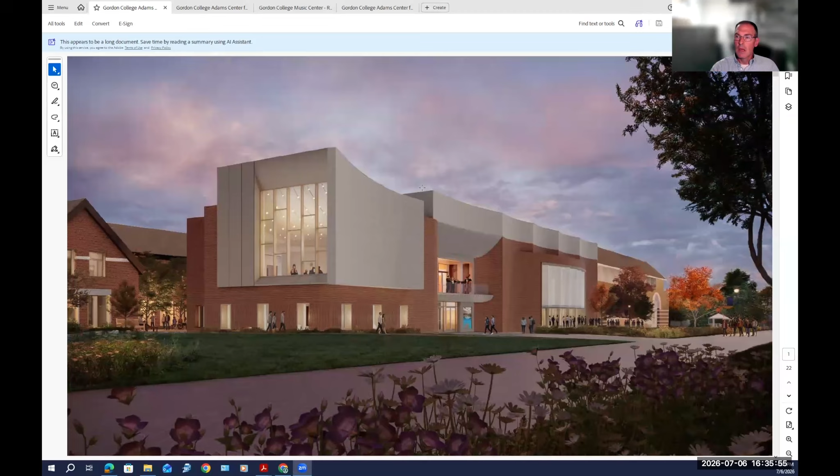This is Jacob speaking from Waterfield Design Group. The first couple images here are the architectural views of what the building will be. We went through this last time, so nothing has changed here in terms of what the building looks like. It's the removal of the existing courtyard, walkway, and landscaped area, replaced with a new proposed Adams Center for music and associated patios and walkways. The new building is approximately 15,000 square feet. So this is rendering what it'll look like looking north, looking south. This is south looking north.

Just real brief, existing conditions: the walkways, the existing Phillips Center, the conservation setbacks, which we can talk about briefly when we get to that part of the project. New layout with the building taking across the walkway areas, walkways getting bumped out to make a streamlined main campus corridor coming through, with different patios in the front and also in between the two buildings.

Utilities and stormwater, we've gone through the peer review. I can just talk briefly about that. There were some comments from Weston Sampson; we addressed those comments. I think the only thing that really showed much on the plan is we added a couple more chambers to meet the 25 and 50-year storm requirements. Other than that, there were some more technical details that I won't get into unless necessary.

I'll just say the one item that probably will come up is a note we added to the plans saying we'll do an additional test pit in the recharge area to confirm there's no groundwater within 4 feet of the bottom of the chambers. We're already at 3 feet 2 inches, so we just need another 10 inches. That wasn't plausible with the whole campus going on around us, but during construction that'll be an easy test pit to dig and confirm.

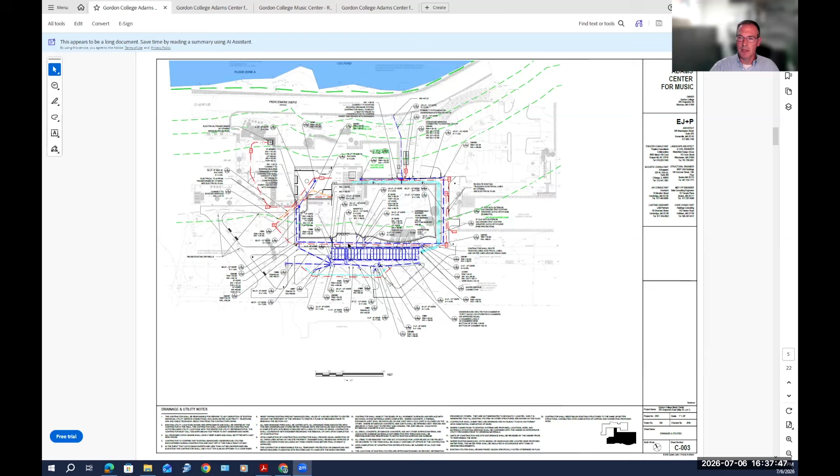And then landscaping, we've gone through with conservation, and they're good from what we've seen so far from the plantings and everything in the rear.

I'll just say this quickly. We're meeting with conservation on Monday. Really the last item outstanding from our previous meeting was the peer review, and the peer review signed off -- they were good. So we anticipate we will get Conservation Commission approval on Monday now that we have a clean bill from the peer reviewer.

And I'll let Amanda talk about the lighting.

The new exterior lights will all be downward directed in the high circulation areas and provide safe light conditions in the campus environment. They will be controlled by a digital lighting network, which can be programmed to turn off groups of light late at night as determined to be practicable and safe.

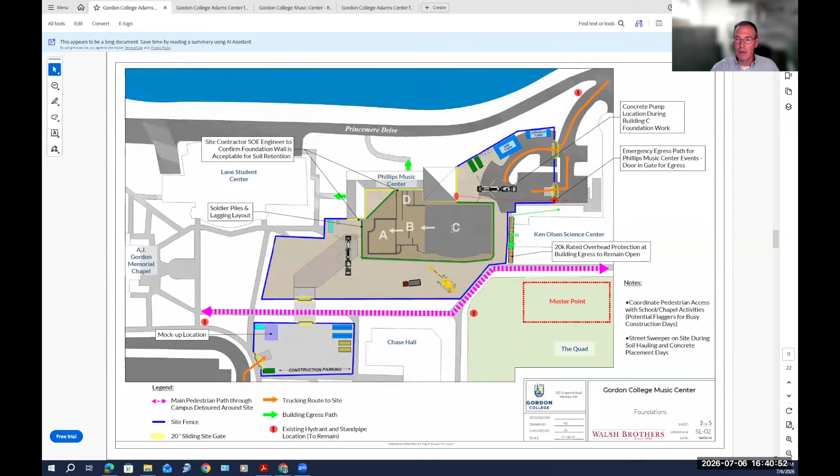Rich, do you mind if I just say a couple things? Of course, okay.

Jacob, about that construction route, where do you anticipate those trucks coming from? Mostly 128? Yes, mostly. Will there be -- they won't be going through Wenham? Correct, they'll be coming mostly construction vehicles from there. Okay, that's one of the things we usually like to confirm.

Just so the board knows, and the Gordon College people, I had sent a memo to the board with some comments -- that we can condition the test pit issue. So we talked to our peer reviewer as well as the building inspector about that. And I can make a recommendation afterwards. As Jacob mentioned, the Conservation Commission has reviewed and should be issuing their order of conditions sometime next week.

Everything's been dated and stamped by a registered engineer as we requested. The landscape plan was approved by the tree warden, so they are comfortable with it as far as invasive species and location of plants. And we've already discussed the lighting, so the board can discuss or ask further questions if needed.

Just so you know, the plans did go to the police department and assessors. We don't need to send it to water or the Board of Health because Gordon College gets their water and sewer from Salem Beverly Water Board, so there were no concerns there. The fire chief did finally sign off on these plans.

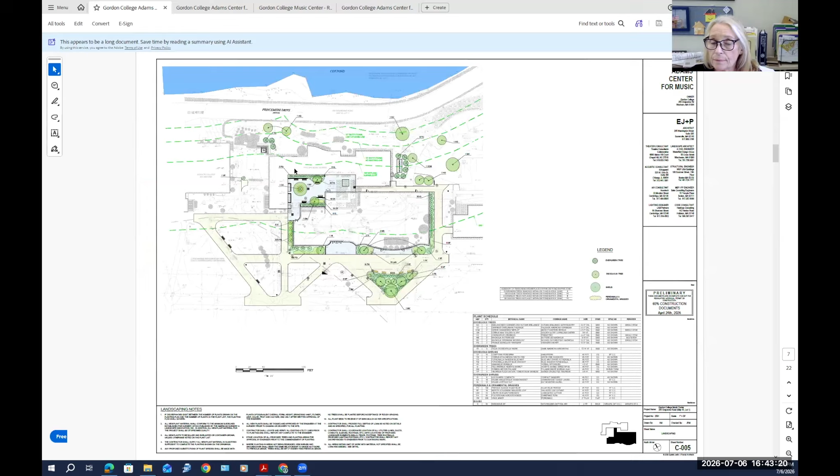Now, Chris, I know Ryan wants to talk a little bit about the handicap bathrooms, unless the board wants to ask questions on this part now, that's fine too. Rich, you can decide -- ask questions about the bathrooms now or table those until after? If you want to start with Adam's questions, feel free to.

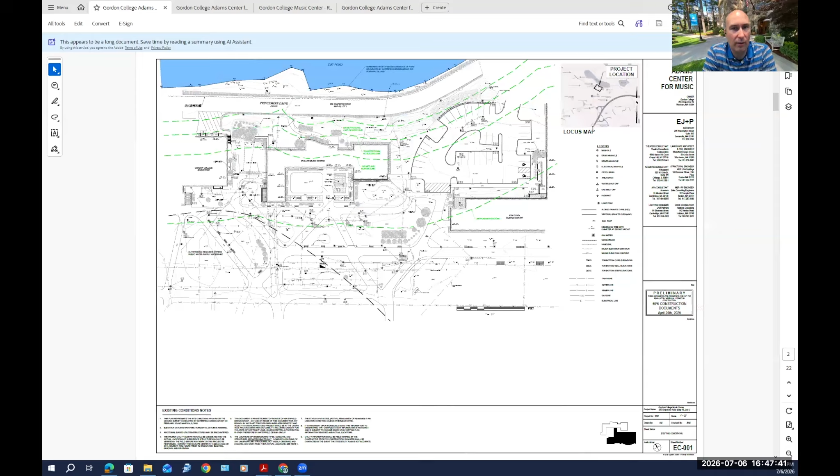Jacob, can you go back to the site, the view that also shows Lane Student Center? If you look to the left of the project work zone, you've got the Lane Student Center adjacent to the chapel. On the right side of the Lane Student Center, you see a larger full built-out area, which is where our college bookstore is on the second level and the mailroom down below. On the left side, closest to where it says Lane, you have a student venue, a little cafe area, and we're looking to bump out the building to the left about 400 square feet total.

Margaret, you have a set of plans that's already been through Conservation Commission for a negative determination. They said good luck with the project, moving on. So we're really just trying to get the formal site plan approval for being able to proceed with adding 2 ADA bathrooms to the campus space here.

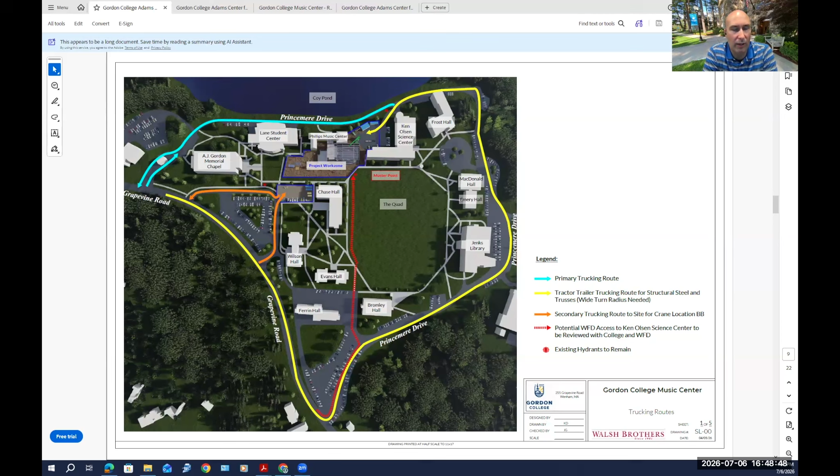I wasn't sure if, Ryan, you had any other comments you wanted to share, and if Margaret, if you had the plans to pull up, which might mean Jacob needs to stop sharing the screen. Yeah, all right, I have them. Let's see, there they are.

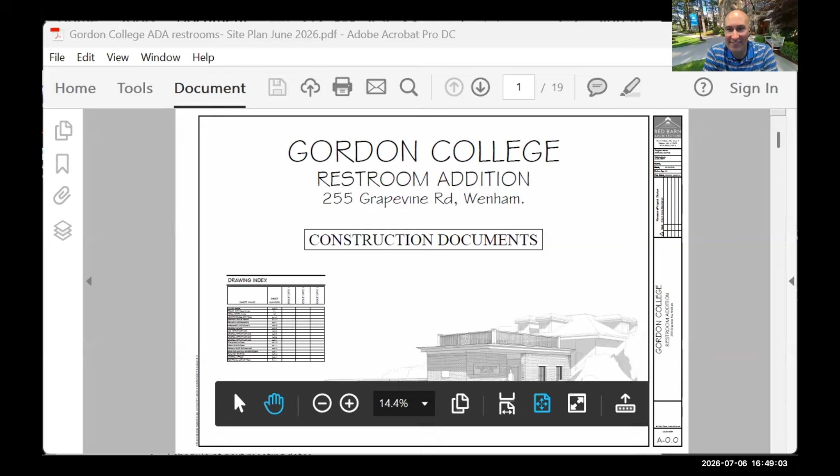So again, everything in Wenham is within the 200-foot buffer zone, so they went through and looked at that. Site plan, that last one, so it's right there. There's an existing patio there that just gets bumped out. It's outside the 100-foot buffer zone where you see that line right to the top there.

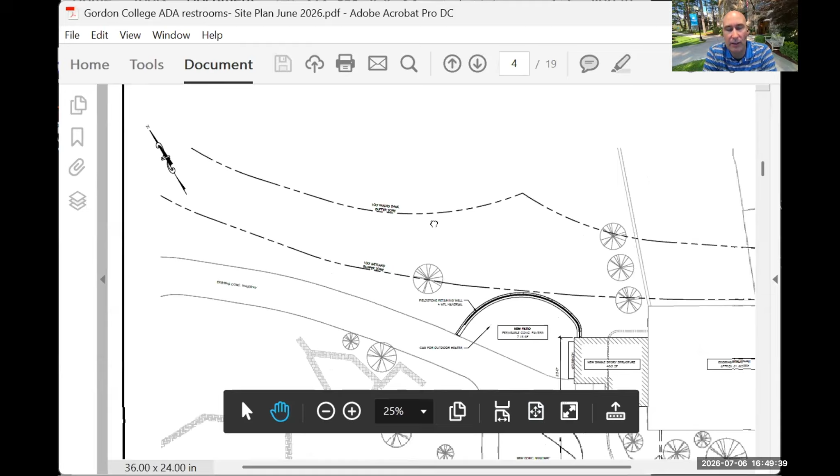And then the walkway gets extended there. So again, we maintain our same existing pedestrian path. Emergency vehicles use it for circulation as needed. And if we can go to one that shows the interior layout. Keep going, almost there.

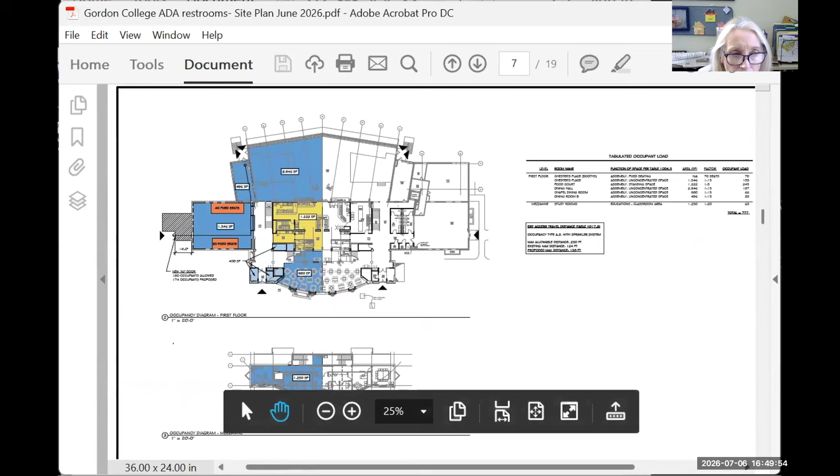Okay, so again, it's considered a minor addition, but the way the Wenham code is listed, because it's an exterior addition, it needs formal ZBA approval. So Rich wanted us just to pass it through you. Yep, is that it?

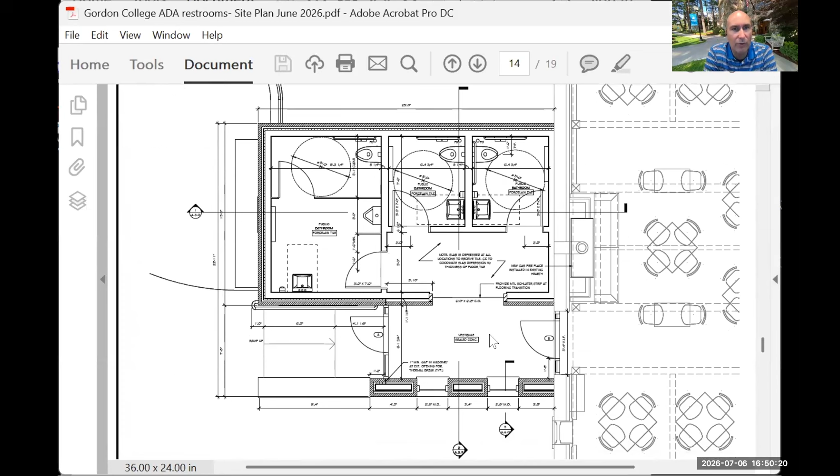It's similar to this, I think you've got an old one. Yeah, I think so too. I can share my screen if that's helpful. Yep, sure.

Yeah, we did some value engineering and just dropped it down to 2 bathrooms. Oh okay, yeah. And then we went from the beautiful curved patio to straight concrete forms as well.

So yeah, in this view, the bulk of the Lane Center is over here on the right-hand side of the page. The chapel is over here off page left, and our addition here is about 22 feet 4 inches out from the face of the building by about 23 feet in this dimension here.

We'll have a completely accessible entrance on this side over here, as well as access to these two new bathrooms here on the side of the building. And in the 3D rendering, here's the existing building beyond, and our little addition on this side of the building over here. So it fits in with the character of the building.

Reviewed with Rich and the fire team before, and again, considered a minor project, no main concerns. Margaret, were there any other comments from any of the departments on the expansion? No, no one had comments on this, and the building inspector was comfortable with it. Great, I have no comments on it.

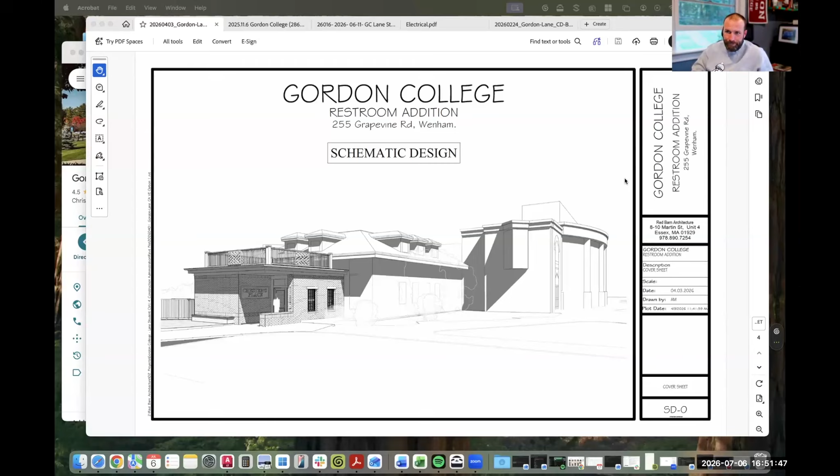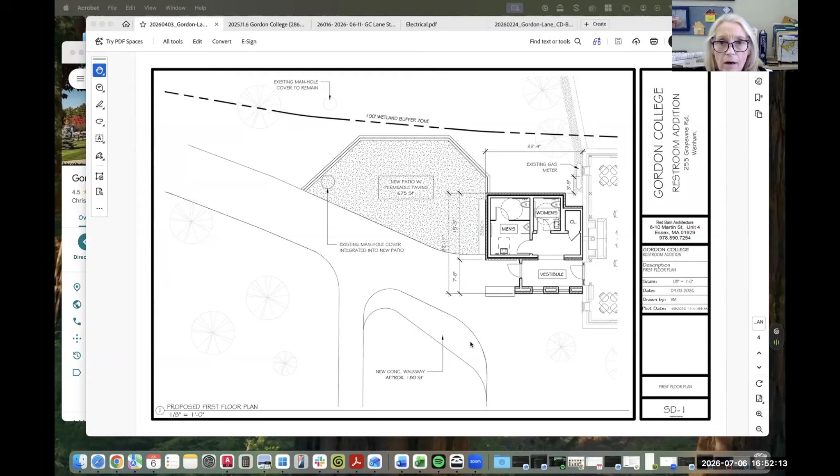Rich, we had come up with a few conditions. Deborah, they're different than the ones I sent you last week, I think. We just had to make a little amendment to them. So if you want, I can bring that up, I can put it up on the screen. These are our recommended conditions, and I don't think they've changed since we spoke last.

Sounds good. Rich, let me just see. Here. Is that it?

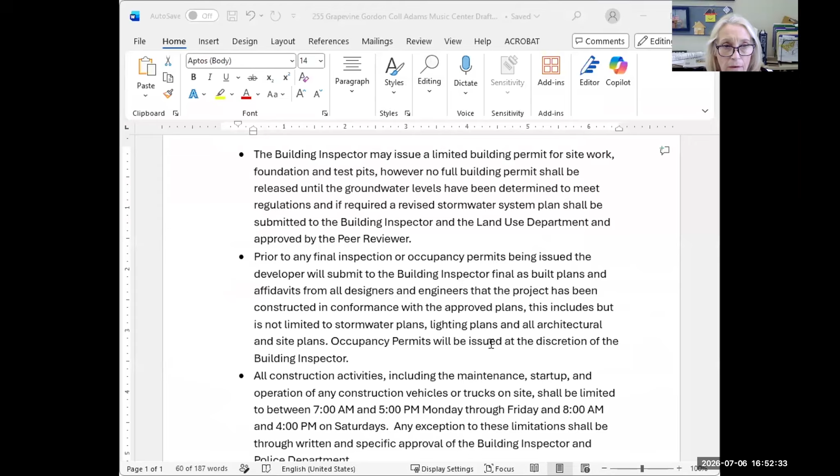Okay, so I spoke with the building inspector, and he recommends that the language for this is that he may issue a limited building permit for the site work, the test pit, and foundation work, but then no further work will be allowed until we get confirmation that the test pits and the groundwater was suitable, and we'll have that reviewed by our peer reviewer.

Jacob, do you have any concerns with this? Just because I haven't seen this before, so. Jacob, you're mute, Jacob. Sorry. Just in terms of the timing, I mean, I think that we will probably be requesting a site work building permit anyway as part of an early package, so that doesn't concern me.

Right, but I think it should be fine. Yeah, it'll be done early on. I mean, you'll want, we'll want Walsh to get set up.

We don't want to, but once they've got the fencing up, once they've got the site kind of cleared, it's usually best if they actually kind of take the topsoil and the brickwork off and stuff, and then we can easily just, so that'll be part of that. So that's understood. Yeah, thank you.

Just saying from a timing perspective that it will work for y'all to ensure that the test pit, the boring comes back as we thought, but you still have the ability to start site work.

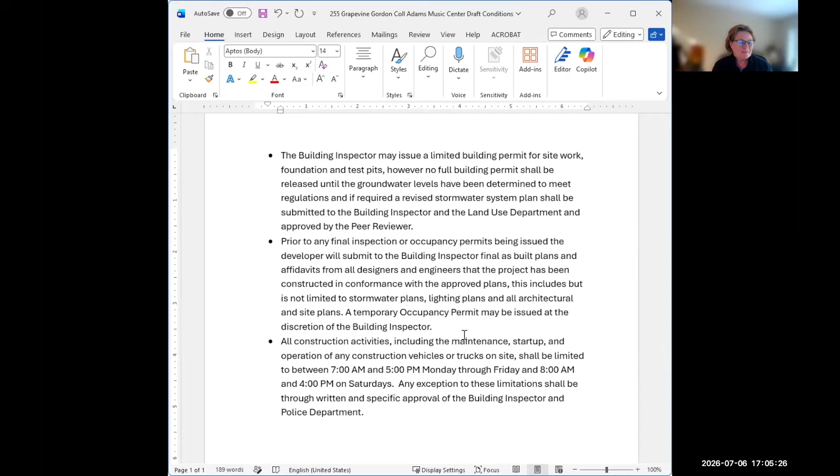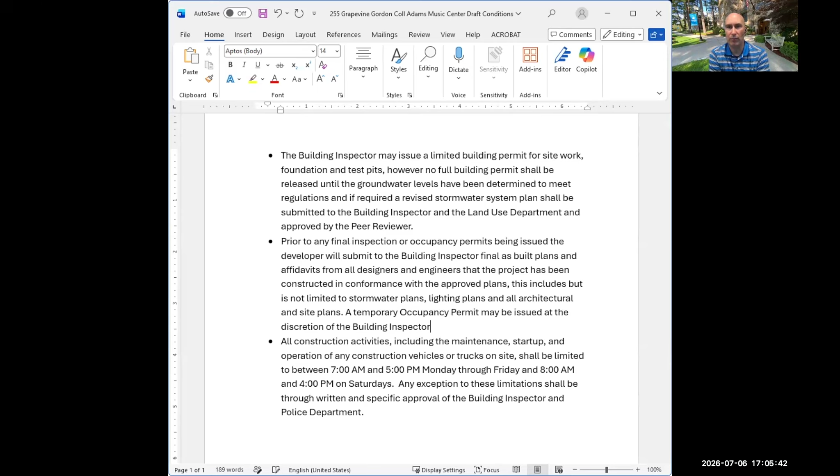Could you put a timeline around when the estimated as-builts will be produced? Is 60 days going to be enough, Deborah? Yeah, I mean, I think it's 60 days, but maybe 90 days. I think it would be good to put more, because sometimes that happens. But they also have the ability to issue another temporary, that's their discretion. Yeah, I think even just leaving it as a temporary occupancy permit satisfies it, because it reinforces that he has the authority to issue and or revoke. So I could say a temporary occupancy permit may be issued at the discretion of the building inspector prior to submission of final as-built plans. Yeah, I think that suffices. Thank you.

I know we asked this briefly before, but does the town expect the as-builts to be contractor as-builts, or are they looking for something else? I can only speak to stormwater and civil, but we oftentimes provide affidavits, and they're also based on site visits as well as the contractor's as-builts. Just want to make sure that's sufficient.

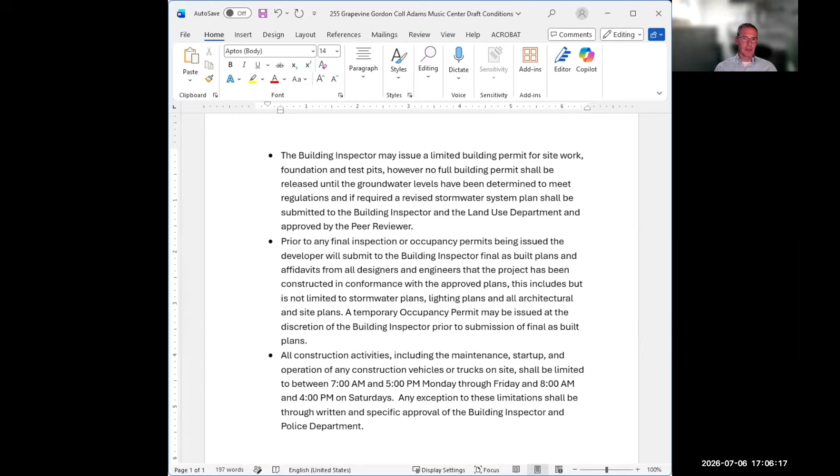I think for the stormwater, they would be looking for yours, Jacob, for an engineering as-built, and then the contractors do the buildings, right? Yeah, I think if you had the final as-built plans by contractor and affidavits from all designers and engineers, we would be comfortable with that language.

From developer, is that what we're calling them? No, contractor. From contractors, okay. Probably contractors. More than one.

And the third is related to construction activity timing. Chris, you said you guys were okay with this 7 to 5, Monday through Friday? I looked at it, and again, any exception would require written approval.

Deborah, any concerns with that language? Pretty standard. And you don't work on Sundays, right? Typically not. And then again, as Deborah mentioned before, as we get into the second year of the project, most of the work will be interior, so less concerns for our adjacent students or any distant abutters, etc.

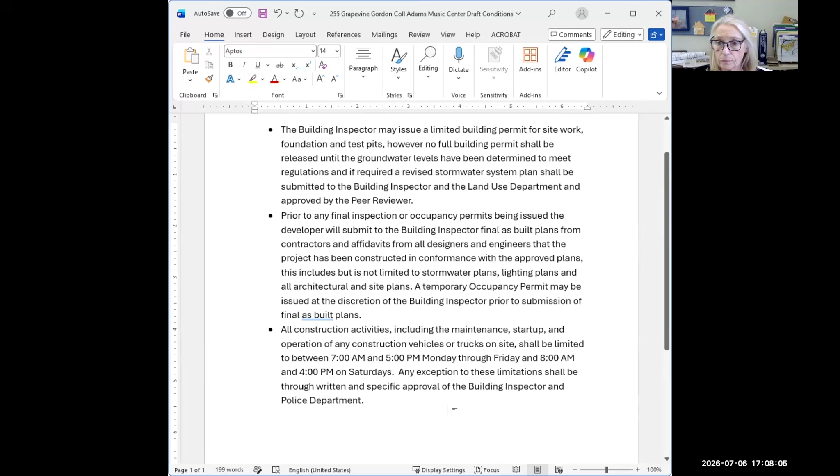Is everybody satisfied from a timing perspective, everything? Okay. All right, Margaret, any other commentary? Are there any other members of the public? I don't see anybody, but are there any other members of the public that would like to comment on the project?

Am I speaking to myself? Is there anyone? I think we got everybody here. No, I don't see any hands raised, and there's no other people on the call. Okay.

All right, Rich, I would just mention, if you do make a motion to include the ADA restrooms, then you're completed with the plan. Okay, yeah, I was just thinking through that in my head. So bear with me, this is a very long motion, it might take a minute to read everything.

I would like to motion to approve Gordon College's request to expand the existing student center to include 2 ADA bathrooms, and to approve the site plan for the new Adams Music Center, with the following conditions.

One, that the building inspector may issue a limited building permit for site work, foundation, and test pits. However, no full building permit shall be released until the groundwater levels have been determined to meet regulations. And if required, a revised stormwater system plan shall be submitted to the building inspector and the land use department and approved by the peer reviewer.

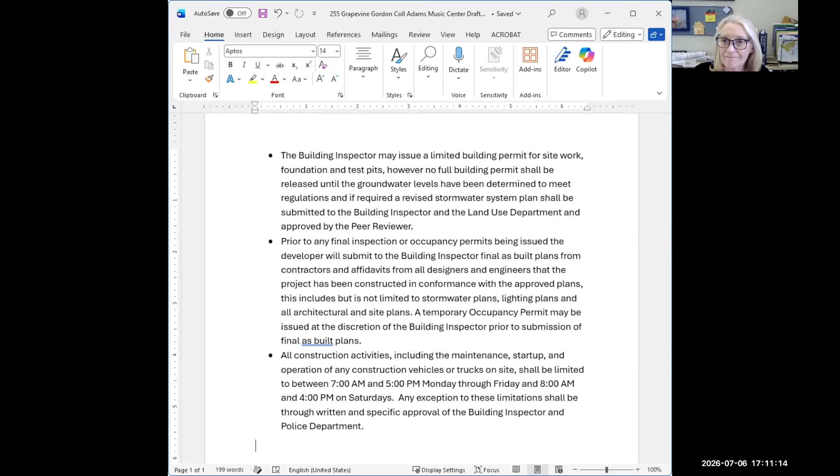Perfect, thank you. And with that, I will motion to close the public meeting—the public hearing, excuse me.

Do I have a second? Oh, I second, sorry. All in favor? Kelly Schmidt, Amy Cooper, Rich Modulewski.

Thank you for bearing with us. I appreciate you all accommodating some of the scheduling issues. Very much look forward to seeing it when it's built. It looks like it's going to be a beautiful building. Thank you for partnering with us on this.